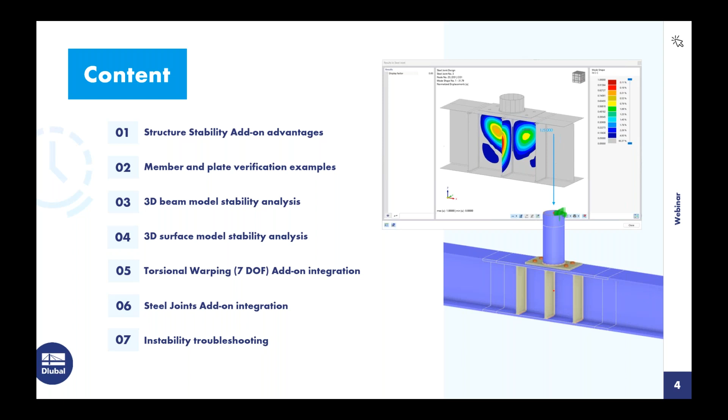So to begin, when looking at the structure stability, this is an optional add-on within the Rfem 6 program. This allows us to run an eigenvalue analysis to determine the critical load factors and eigenvectors, or in other words, the buckling modes of our structure. Therefore, we can evaluate the stability of the structural system in regions prone to buckling.

So when we're talking about regions prone to buckling, we're typically referring to very slender beams or columns or thin-walled shell or plate elements.

Now, everything that we'll be carrying out today will be according to a linear eigenvalue analysis, which we'll talk a little bit more about in the next slide, but keep in mind that a nonlinear stability analysis is also available where we can increase the load increments to see the failure of the structure.

As already mentioned too, not only can we look at the buckling modes of the structure, but we can carry out instability troubleshooting to locate modeling errors with a load-independent eigenvalue analysis.

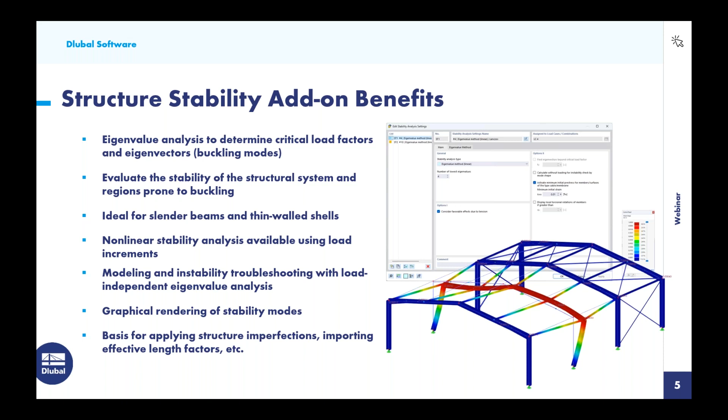Now, of course, through all of these examples we'll see the graphical rendering of the stability modes as we see over here on the right-hand side. Then we can integrate for further capabilities within the static analysis, such as applying structure imperfections. We can import effective length factors, and we'll see those carried out in the further design examples.

Now, when we do activate this add-on, we have 3 analysis types available to us. The first is the eigenvalue method, or a linear analysis, and this is essentially where the buckling modes are determined through a linear method. If we have any nonlinearities defined, either material or geometric nonlinearities within the model, these are internally converted to linear elements in order to carry out the stability analysis with constant stiffnesses.

Now, alternatively, we do have the incremental method with an eigenvalue analysis. This is nonlinear and will take into consideration all geometric and material nonlinearities. Essentially, we will carry out the failure criteria and nonlinear effects, and these will be included during the incremental loading increase. We will find the last stable state with this nonlinear analysis to carry out the linear stability analysis, or the eigenvalues.

The third option here is the incremental method without the eigenvalue analysis, also nonlinear. This is identical to option number 2 with that nonlinear analysis capabilities, except we simply won't carry out the eigenvalue analysis within that last stable state. With all of our examples today, we will be utilizing the linear eigenvalue method, but keep in mind if you do have those nonlinearities, it's capable within the add-on to also utilize these nonlinear options.

Looking at this example within Rfem 6, our main base program, we can see this W section profile with the 100 kip load applied at the top, the pin roller scenario, 12 feet high. We want to activate the structure stability add-on, which we can do within our toolbar by accessing our base data, or by right-clicking on the model name to access that base data dialog box. Under the second tab are all of our available and optional add-ons. For today, we're going to be utilizing the structure stability add-on.

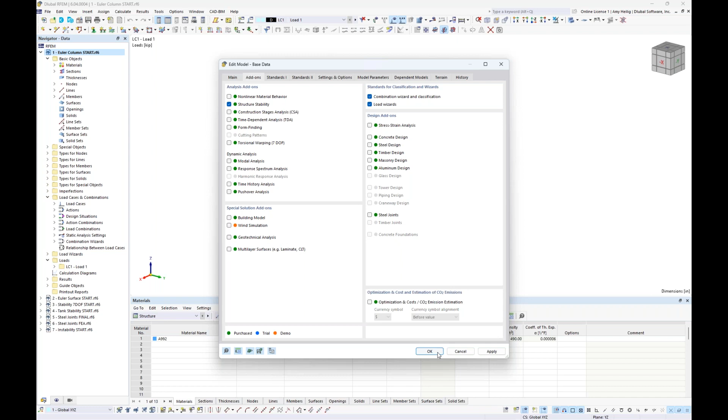When I click OK, pretty much nothing changes within the model itself, but we can go into the load cases and combinations dialog box. I currently only have one load case defined with that 100 kip load applied at the top of the column, and this will be carried out according to a first order static analysis. But we can activate the structure stability add-on with this checkbox at the bottom.

Looking at the default definition types, you'll notice there are two definition types immediately set. The first is an eigenvalue method linear analysis, which we should recognize from the PowerPoint. We'll carry out that linear analysis for today, and then we can set the number of eigenvalues to solve for - the default is 4, but we could increase or decrease this depending on our model. The second default setting is identical, just with a higher number of eigenvalues set to 10 by default. So carrying out the linear analysis with 4 eigenvalues, we'll click OK.

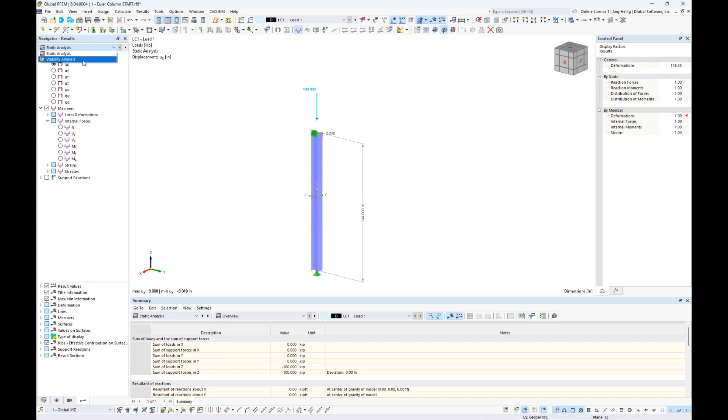To run this calculation, we're going to initially calculate the static analysis with this first load case, but then we will carry out the second calculation for the stability analysis. We're not so interested in the static analysis results, but immediately we jump to the stability analysis results now available in our navigator. When we look at the results for the structure stability add-on, we will see 4 different eigenvalues that we have solved for. In addition, within the table, we'll also see the critical load factor given.

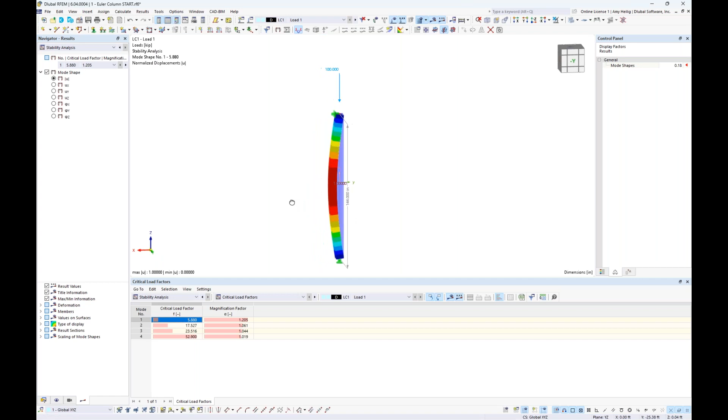The critical load factor for this first buckling mode shape, which we can see is buckling out of plane in the weak axis direction, is the factor that we can multiply the applied loads by - in our case 100 kips - before we see the structure fail, as shown with this first buckling mode shape. The second mode shape is buckling in the strong axis direction, and as expected, we see a higher critical load factor of 17.527. Again, we multiply this factor by the 100 kip applied load to determine the critical buckling load.

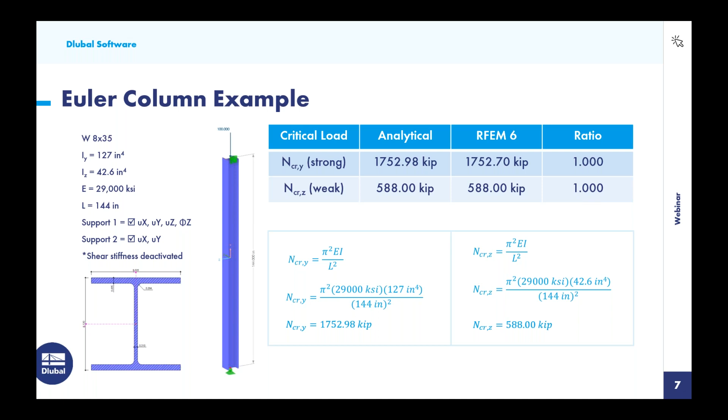So we take this information back to the PowerPoint to compare to the analytical calculations we've carried out within this slide. We can see that compared to the Euler buckling formulas, the Rfem 6 comparison gives us a ratio of 1.0. I think it's important to understand how we're carrying out this structure stability for simple flexural design here for the stability modes.

So we go into RFEM here to open up this example. As mentioned, this is a two-dimensional surface, 10 inches wide, 50 inches tall. I have left on the display here of the FE mesh, so you can see how the structure will mesh this for this two-dimensional object. We also have a 1 kip per inch load applied at the top here.

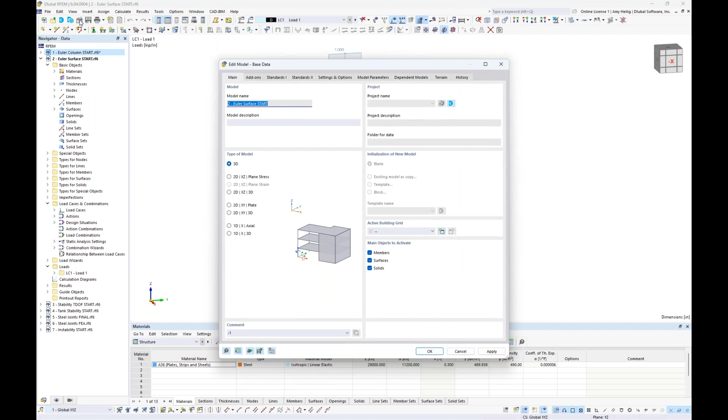Very similar to the column, we want to go into the base data, and we can do so within the toolbar directly to activate under this second tab, once again, the structure stability add-on. We go into our load cases and combinations. For this example, we have our single load case here with the 1 kip per inch applied as a line load at the top of this 2D surface element.

We want to not only carry out the static analysis, but also the structure stability analysis. We'll leave these default settings here for a linear analysis, carrying out 4 eigenvalues, and we can run this calculation. The program would initially mesh a structure if we didn't already have it, carry out the static analysis, and then we move on to the stability analysis.

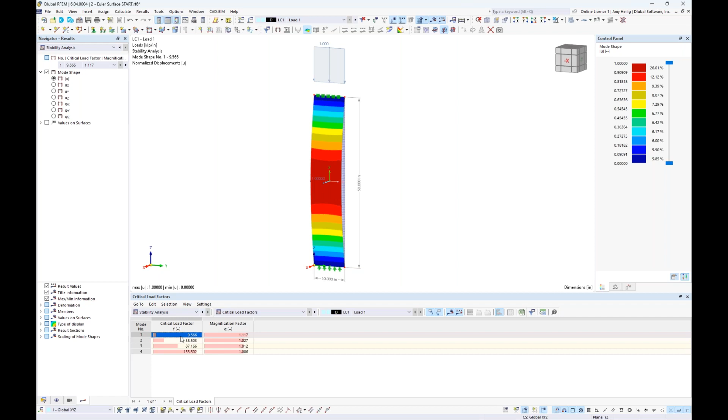Taking a look at our stability analysis results here within our dropdown, we see our 4 different mode shapes. The first mode shape you can see here is buckling out of plane for this 2D surface element with a critical load factor of 9.566. Taking a look at these additional mode shapes, we can see here the deflected shape, but the critical load factor here is much higher.

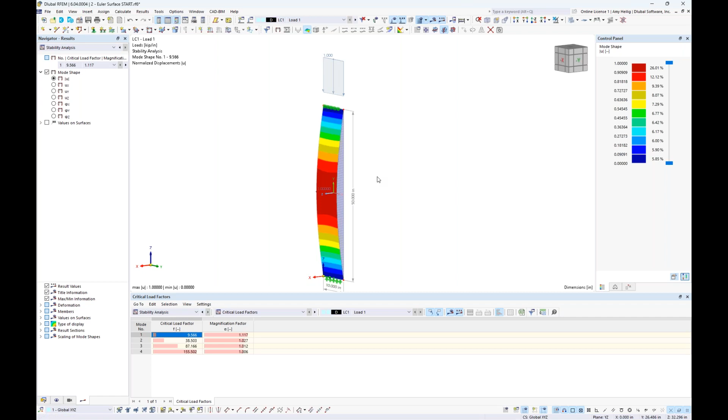In reality, we're most concerned with the lowest critical load factor. Again, this is the factor, this 9.566, that we can multiply the applied load here of 1 kip per inch before we would expect to see structure failure or the buckling out of plane. We take this information back to the PowerPoint to compare to the analytical formula, and we find a ratio of 0.997.

That should give us a better understanding of the basic behavior of this structure stability add-on for a simple beam and a simple surface. Now let us go back into RFEM to open up our third example.

This one should be a little bit more interesting, where we have a 3D structure that is composed entirely of beam elements. You can see that all of these are member elements for our columns, beams, braces, represented by a single line element here. So no surfaces for this particular example.

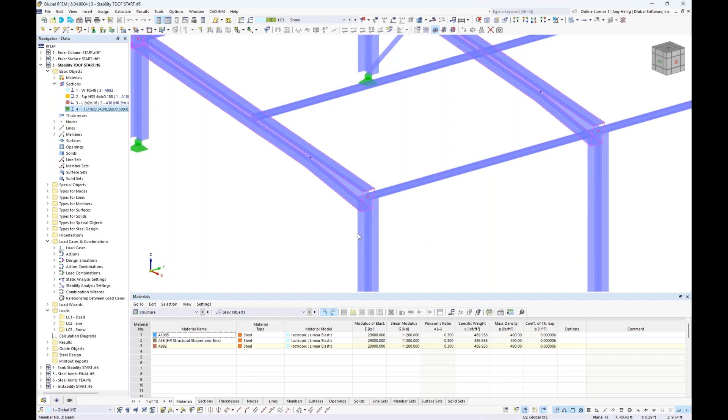For a quick overview, the cross sections are from the AISC database. So we have W10 by 49s. We have some square HSS sections spanning between these moment frames, single angles for our cross braces here for lateral bracing. We also have a very small taper for this beam member, in particular at 25% of the member length before it frames into the vertical columns.

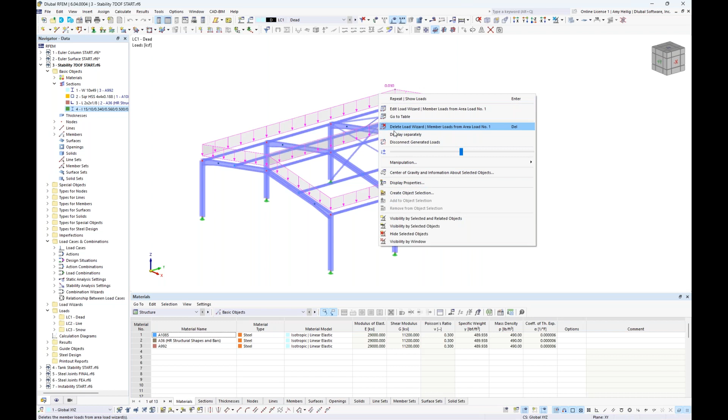Now, to quickly take a look at the loading for this example, I have only 3 load cases defined. We can view these loads here, and these are just general area loads created with the load wizard for dead load. If we're curious to see how the load distribution looks, we can right-click to display separately, and notice that I have created a one-way area load distribution so that the loads are mainly on these main beams here rather than the HSS spanning in the global Y direction.

We can also view here the live load, same concept. If we want to view the area load instead, we can see this shown here on the structure with a varied magnitude.

And finally, we have a projected snow load in the vertical direction. So for this example, I have applied only gravity loads. I think it's important to understand that when we're talking about the buckling behavior of our structure, we want to evaluate the worst case scenario where we have the highest compression forces in our members. For example, in our column elements, we want to see the highest forces acting in the downward direction. This is typically with gravity loads.

If we were to include wind uplift forces, this is only going to do us additional favors in terms of the buckling behavior, because now we have introduced additional tension forces in those members. So when we are evaluating the structure stability, we really want to look at those downward compression, possibly gravity only loads.

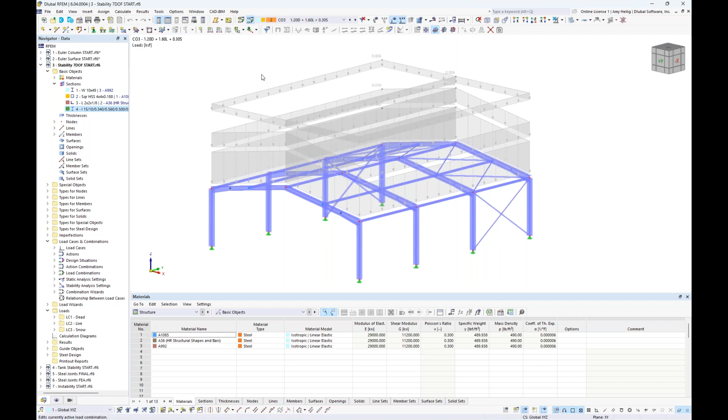Okay, so I have additionally combined these load cases into load combinations according to the ASCE 7, and we can see those displayed here graphically along with the relevant load factors. I'm going to go into my load cases and combinations. Now, we certainly could activate here the structure stability for each individual load case, as we did in our previous simple examples. But instead, I'm interested in carrying out the buckling analysis for my load combinations instead, where I have combined all the load cases together.

Now, the program by default creates 2 design situations based on the ASCE 7 2022 in this example. You can think of a design situation as simply grouping together all of our factored load combinations. We can see this here, LRFD according to the ASCE 7, as well as our second design situation, which groups together all of our unfactored load combinations. This will eventually give us an envelope solution for those factored and unfactored load combinations together.

Under the combination wizard settings here, I can go in and you'll notice that everything is solved here for our load combinations according to a second order analysis, but we have the ability to activate the stability analysis here directly within the design situation. These default settings are identical to what we saw previously within the load cases, that we can carry out the linear analysis, and perhaps I increase this to 10 different eigenvalues to solve for this structure.

So now that I have activated it within the design situation itself, I take a look at the load combinations individually listed out, and I can see now by default that the structure stability add-on is activated here. That's simply because I have activated that checkbox under the design situation itself. Now, by all means, we can come in here and individually carry out the structure stability for each individual load combination as well.

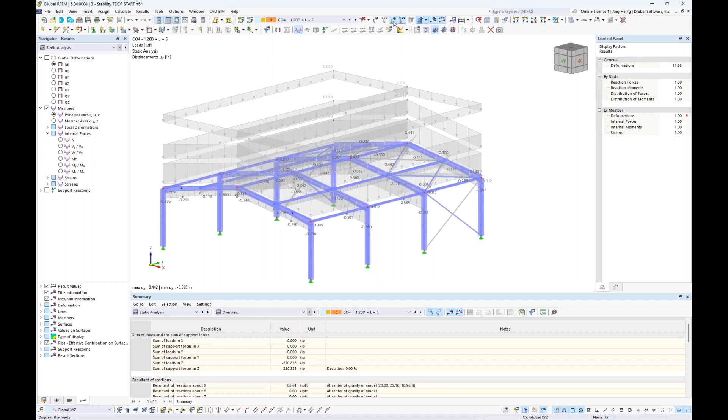So when we toggle this drop down to the design situation for our factored load combinations, again, this is nice because it's more or less an envelope solution for the static analysis. But you'll notice within this table here that shows our static analysis results for this design situation, we have the stability analysis envelope solution as well.

The minimum critical load factor is 10.532, and the controlling load combination is load combination number 3. So this is kind of nice that, again, we don't need to run each individual stability analysis for each load combination and manually check the results, but the program will give us the controlling load combination here.

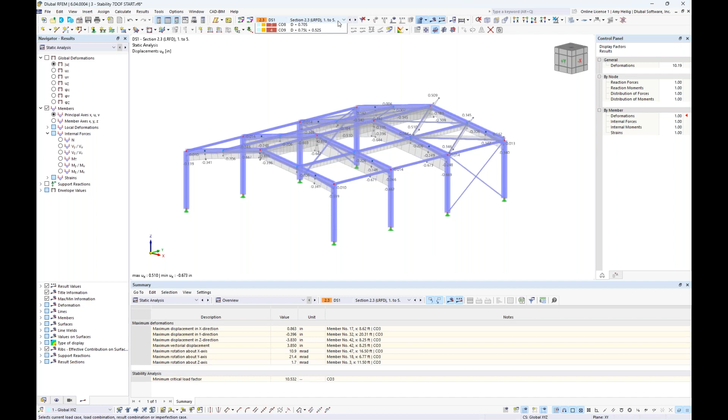So we toggle down just to display the loads for load combination number 3, and no surprise, this is certainly going to be the controlling case because we have all 3 loads activated with the highest load factors to give us the greatest compression forces in our members.

So we will toggle down to the stability analysis results for load combination number 3. As we have input into the program, we had solved for 10 different mode shapes. Starting with mode shape number 1, we kind of see a racking here of this initial moment frame with a critical load factor of 10.532 as we were shown here within the design situation itself. And essentially, we're going to see here the flexural buckling in the strong axis direction of these columns.

Looking at some of the additional mode shapes, we can see similar behavior just in different locations of the structure with a higher critical load factor. As we continue to increase, we may start to see more localized mode shapes. And what I mean by this, where we see the individual buckling of these columns, in particular in the weak axis direction. Whereas compared to the mode shape before, this is maybe more of a global mode shape that kind of affects the structure together.

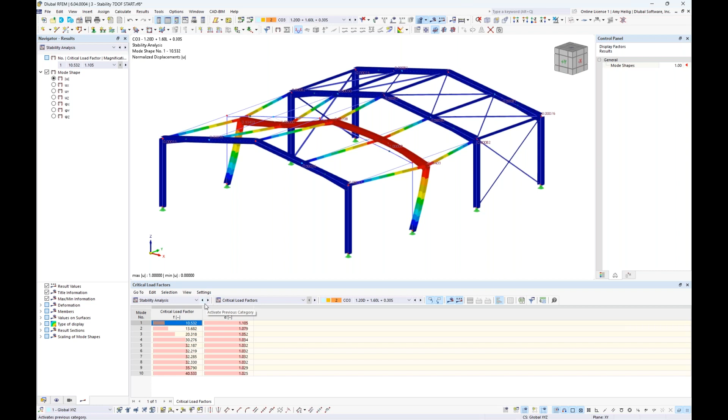Okay, so now that we are looking at mode shape number 1, let us focus in on this particular column, member number 10. When we are looking at the stability analysis results within the table, we can use this dropdown to view the results by member. When I graphically click on this member, the table updates to show member number 10's results, and we have 10 different mode shapes shown here.

In particular, for this first mode shape where we have failure of this column in the strong axis buckling, we can view the equivalent effective length factor, that K value, given as 3.012 in the strong axis direction. We also see here the effective length of 34.64.

So if we plan to take this a step further and design this structure, let's say according to the AISC or the CSA standard, and in particular according to the AISC, we want to design it utilizing the effective length method. The effective length factors are really important, so we have the ability to get that information directly from the failing mode shape here.

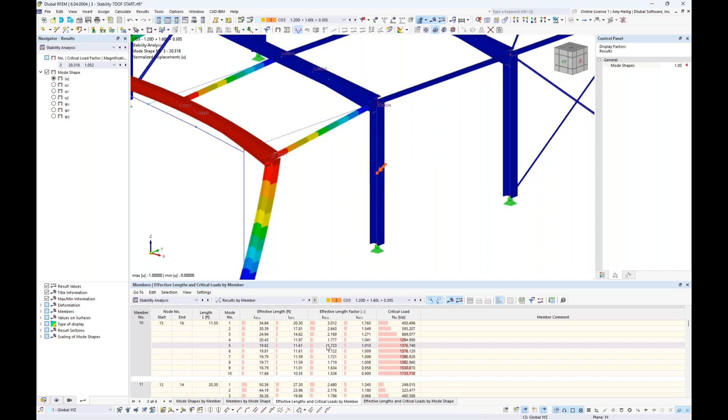Now, when I take a look at these additional mode shapes, they're really not affecting member number 10 until I get down to mode shape number 7, and here we see the failure in the weak axis direction for member number 10.

We see the relevant effective length factor in the weak axis direction given as 1.008, and the effective length as 11.59.

So assuming that we have already activated the steel design add-on within RFEM to carry out the steel design according to the AISC, information such as the unbraced lengths or effective lengths are always needed in order to carry out that design. And we do so by inputting the effective length for the member directly.

I want to show you a nice feature here: assuming we're carrying out design according to the AISC with that steel design add-on, we input our first effective length definition, where you have the ability to import from the stability analysis. When I turn on this checkbox, I get a new tab here where for the strong axis direction, for consideration of flexural buckling about the major axes, we can import that effective length factor directly from the stability analysis.

So we choose here load combination number 3, we will choose mode shape number 1, and we can either graphically select member number 10 or choose it within our dropdown. Notice that the effective length factor is automatically brought in as 3.01.

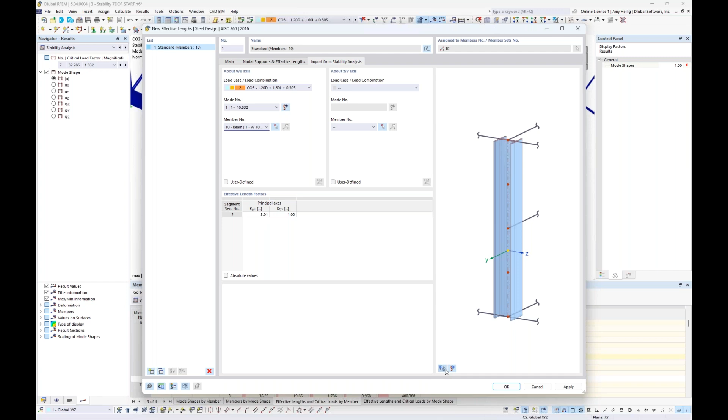We can do the exact same thing for the weak axis direction, again specific for member number 10. We will choose load combination number 3, but this time mode number 7. Remember, that was where we saw this column fail in the weak axis buckling direction, again for member number 10, and we see that effective length factor brought in automatically as 1.01.

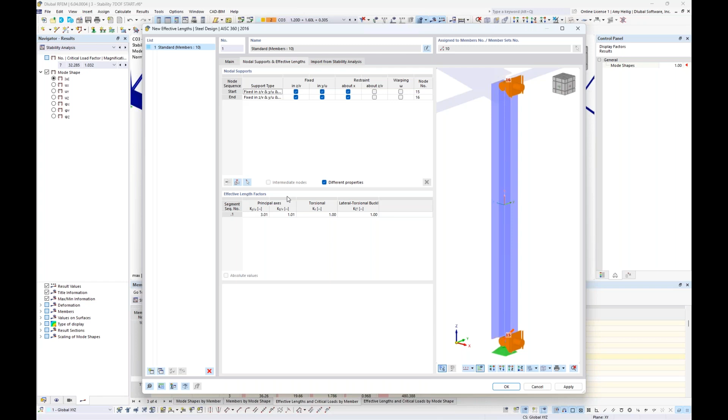So we don't need to do anything further here in terms of the effective length definition for flexural buckling in the strong and weak axis directions if we integrate this with the structure stability add-on.

Okay, so now that we have covered the basic stability mode shapes here, keep in mind that everything we have seen so far has been based on 6 degrees of freedom. And with 6 degrees of freedom in these various mode shapes, we notice that we're really only able to consider flexural buckling, and we certainly can see this directly with the mode shapes showing flexural buckling failure of the columns themselves.

But if we back up a step to look at the static analysis results, or the internal forces from load combination number 3, what we'll actually see is that we have pretty high bending forces along the length of our members, and when we look at our columns, pretty high axial forces of course. When we're talking about these bending forces, for example for these beams, this should immediately flag us that possibly lateral torsional buckling is an additional stability failure state that we need to consider.

So let us go back to the PowerPoint here to discuss these different stability failure modes. Now, we should be very familiar with flexural buckling by now for our members. Ultimately, there's some critical buckling load for the strong axis and the weak axis before we see this member fail with flexural buckling.

But there are also additional failure modes such as torsional buckling, which has its own critical buckling load factor, where we would see the member twist about its longitudinal axis. This might be quite common for something like a cruciform section.

Then we also have flexural torsional buckling. When we have an applied axial force on a member like a single angle that's unsymmetric, we're not only going to see flexural buckling, but it's also going to twist about its axis.

And of course, lateral torsional buckling is also a consideration when we have a bending moment along the length. So for singly symmetric or unsymmetric sections, we're not only going to see it move out of plane, but also twist about its own axis. The problem is that 6 degrees of freedom can only consider flexural buckling.

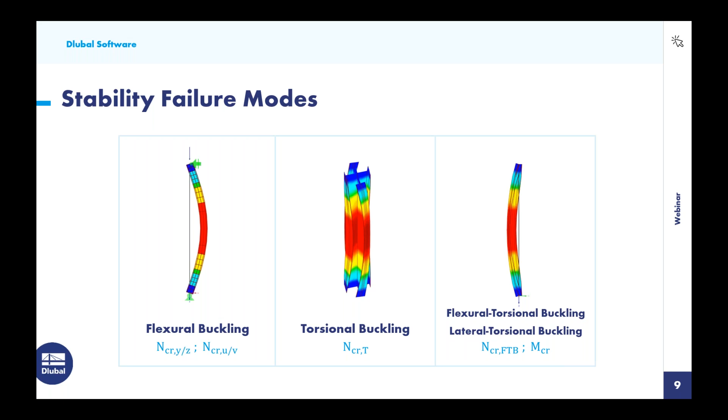Now, we can say, well, if we're designing according to AISC or CSA, the codes have analytical equations that design for these additional stability failure modes. But that's in the design process. What I'm talking about specifically is the static analysis as well as the structural stability. So how do we consider these additional failure modes?

The answer is to enable the 7th degree of freedom, or warping. We have an additional add-on within RFEM 6 called Torsional Warping 7 Degrees of Freedom. This allows us to consider cross-sectional warping with an additional degree of freedom for member calculations. And everything is integrated automatically, including both the static analysis and the structural stability add-on, to determine additional member critical load factors and mode shapes.

So again, 6 degrees of freedom can only consider flexural buckling failure. That's everything we have seen up until now. I did want to note that with 6 degrees of freedom, the load application is always at the member shear center.

So now when we enable that 7th degree of freedom, we can additionally capture the torsional, flexural torsional, and lateral torsional buckling behavior. And when we enable that 7th degree of freedom, we get a load application at the center of gravity, or the centroid of the member, instead.

What we will see in just a minute is that when we enable this add-on, we get additional options available to us, such as member transverse stiffeners, to restrain the warping along the member length.

Now, currently in RFEM 6, the 7 degrees of freedom is not linked in the steel design add-on when carrying out steel design according to AISC or CSA. It is currently linked for Eurocode only. We do plan to link those in the future to consider that 7th degree of freedom, but currently the full static analysis and the structural stability can easily consider the 7 degrees of freedom, which we'll see in just a minute. So just keep that in mind if we're taking this a step further with the steel design add-on.

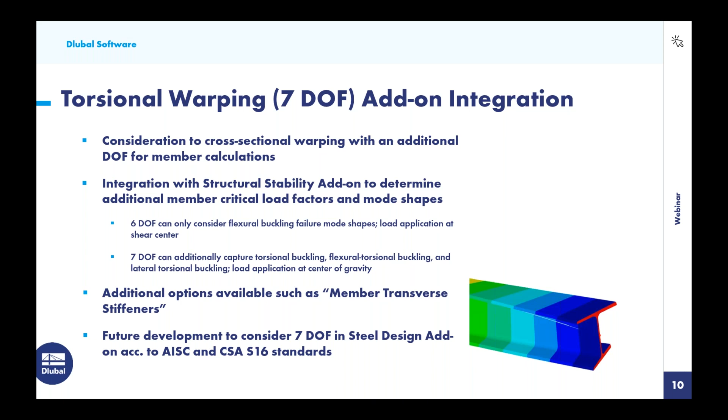Okay, so what we will do here is go back to the RFEM model, and we want to go into the base data. Under the second tab, we will activate not only the structural stability, but the torsional warping 7 degrees of freedom. When I do this, the program says it needs to delete the results, of course, because that was all based on 6 degrees of freedom.

Now, by default, all of our members are considered free to warp. There is no warping restraint along the member length.

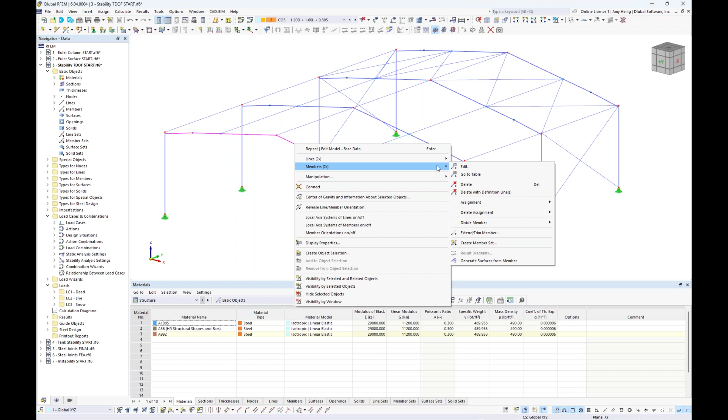In addition, if you would like the warping internal forces to be transferred to adjacent members, it's important to create what we call a member set. So if we want the warping forces with the 7th degree of freedom to be transferred from, let's say, our beam on the right over to our beam on the left, we would need to hold down our control key to make sure both are highlighted. We right click, and under the member option, we have the ability to create a member set. That's simply grouping those members together so those warping internal forces will be carried out to adjacent members.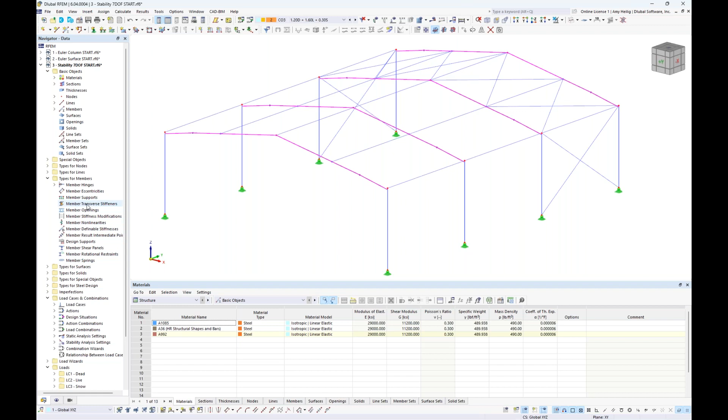Now, circling back to the warping restraints, we should see under types for members that we have a few additional options, including member transverse stiffeners. I'd like to double click on this to create a few stiffener types for these members in order to restrain the warping at the member start and at the member end. Within this dropdown, we actually have several different stiffener types.

For example, we can choose a flat plate where we could input the material and the dimensions, and the program will automatically calculate the warping spring to be considered within the analysis.

For today, we will use this option at the bottom called warping restraint, where we will use the full warping restraint. I want to apply this to the member based on a certain percentage of the length, so I'm going to activate this warping restraint at 0% of the member length, or the member start.

I'm going to add in a second warping restraint at the member end, so 100% of the member length. Then we can graphically select which members we would like to apply this warping restraint to. I'll use my selection box to select all of those main beams, then click OK, and you'll notice we get a nice symbol shown here representing where that warping restraint is located at the member start and end.

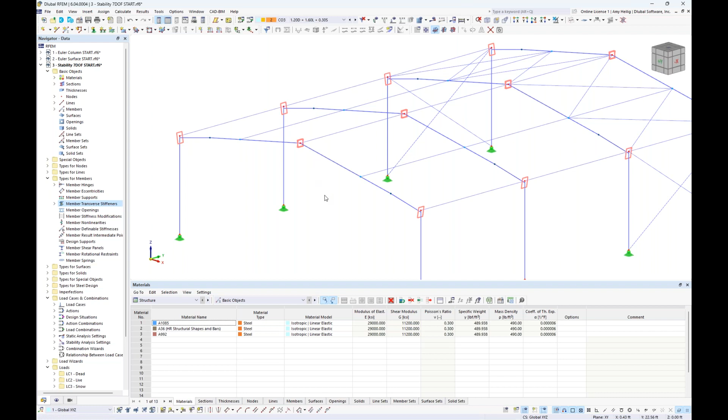Now we want to go to calculate all, and we have to rerun the static analysis with 7 degrees of freedom. We see the load cases carried out, but also those load combinations according to a second order analysis. Then we run through the structure stability again for all load combinations, and we should see slightly different results here.

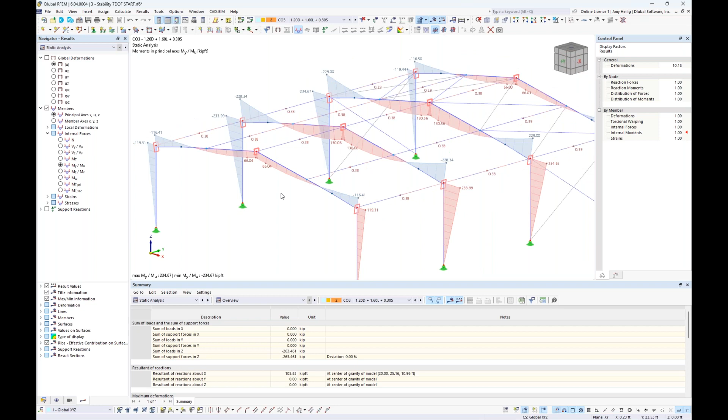Taking a look at the static analysis results, where we can view the internal forces of our members, you'll notice we have a few additional options now with that 7th degree of freedom. For example, we can view the warping moment along the member length, or the primary torsional moment and the secondary torsional moment. This previously was not available with 6 degrees of freedom.

Toggling down to our stability analysis, we should see pretty significant or different results here as well. No longer do our 10 different mode shapes look like what we previously saw with 6 degrees of freedom.

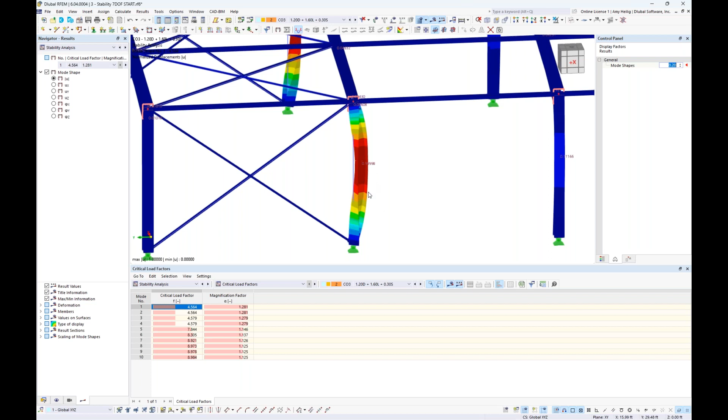The critical load factor is now 4.564, and our relevant mode shape is really focused on these columns. We can increase the size of this mode shape ever so slightly to see how this column has essentially flexural torsional buckling, where it is both bending out of plane but also twisting about its own axes.

So you can see that the critical load factor has significantly decreased. Previously it was around 10.5, and now it's only 4.564, before we go on to look at the relevant mode shapes here.

Now, when we look at these first four mode shapes, it's really flexural torsional buckling of these columns, but then we get into mode shape 5 with a critical load factor of 7.84, and this is where we begin to see lateral torsional buckling of those beam elements themselves.

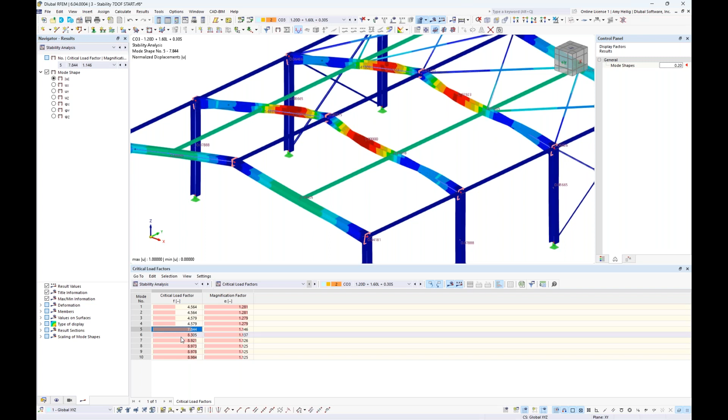So again, when we are carrying out 6 degrees of freedom, if we're only concerned with flexural buckling, no problem, the program automatically considers this. But if flexural torsional buckling, lateral torsional, and torsional buckling are also a concern, then we really would want to consider enabling this 7th degree of freedom.

All right, so this should give us a pretty broad overview now of member stability design. I now want to move into our next example to talk about surfaces.

So you'll see here that I have a tank model, and everything is composed of 2D surface elements. The tank wall is a surface element, as we see here, as well as the tank roof.

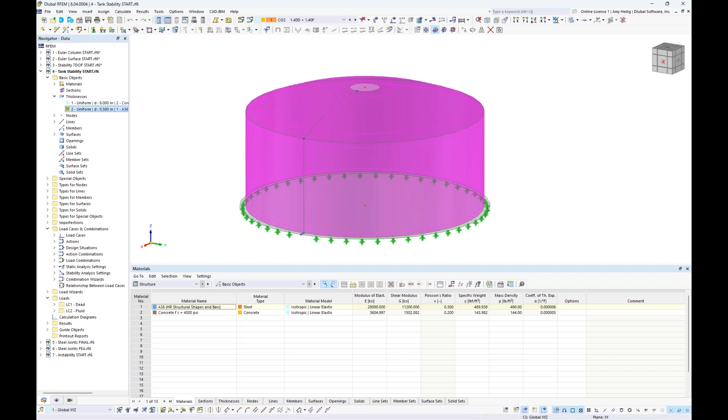To talk a little bit about the thicknesses and the materials, the entire tank wall and roof are going to be comprised of 1/2 inch thick A36 steel material. And then at the bottom here, we have an 8-inch concrete slab, 4,000 PSI concrete.

I did want to point out that this structure was entirely created using our block options up here in the toolbar. When you take a look at the various block options, you'll see all the different categories for the different structure types, including silos and storage tanks.

Within these options, as I cycle through them, you'll see all of the various choices. If I double click here, I have the ability to define the dimensions, the material, and even some loading capabilities are automatically created. That is how this example here was created automatically.

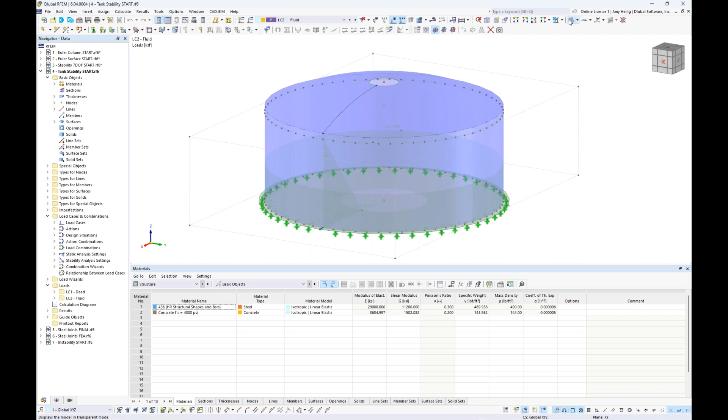For this example, we have only 2 load cases. We have a simple dead load where only self-weight is active, so no additional loads apply to this tank structure. We also have a fluid load, automatically created with the block import option, to represent fluid inside the structure acting with an outward pressure against the tank walls.

We also have a downward pressure acting at the base for the concrete slab. So I've left this with only these 2 simple load cases, because for load case number 2, the fluid load, we get pretty significantly high compression forces in our tank wall to carry out the buckling analysis.

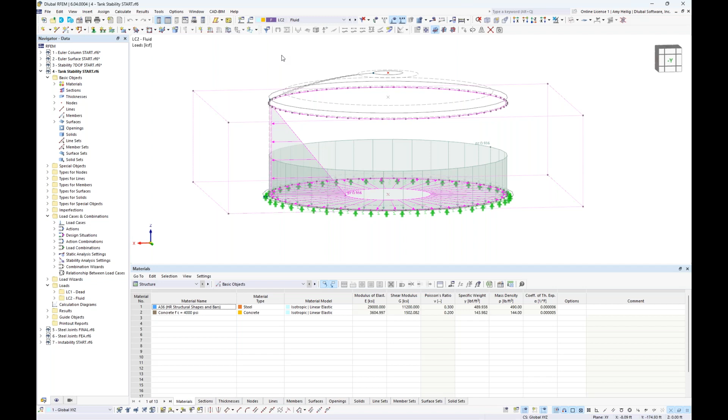So I want to go into the load cases and combinations dialog box, and carry out the structure stability here - a linear analysis with 4 different eigenvalues is fine for load case number 2, the fluid load. When I calculate this, the program will generate the FE mesh for our tank, run through the static analysis, and then run through the structure stability analysis for those 4 eigenvalues.

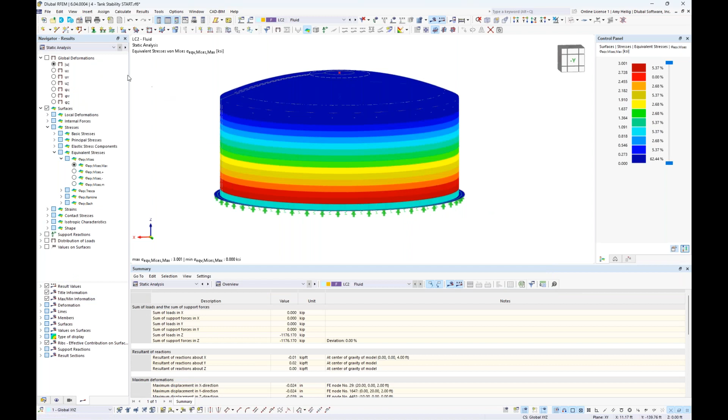Once this is done, we'll see under the stability analysis the relevant buckling shape. I'm going to create a user-defined visibility for only the tank walls, so we can see this in a clearer form.

We have 4 different mode shapes that we've solved for. Notice that the critical load factor is quite low here at 2.882, and we see the relevant buckling mode shape - localized buckling modes all around the circumference of our tank walls. When I look at these additional mode shapes, the critical load factor is almost identical, around 2.8 or 2.9. Just notice that the location of these buckling modes has changed ever so slightly.

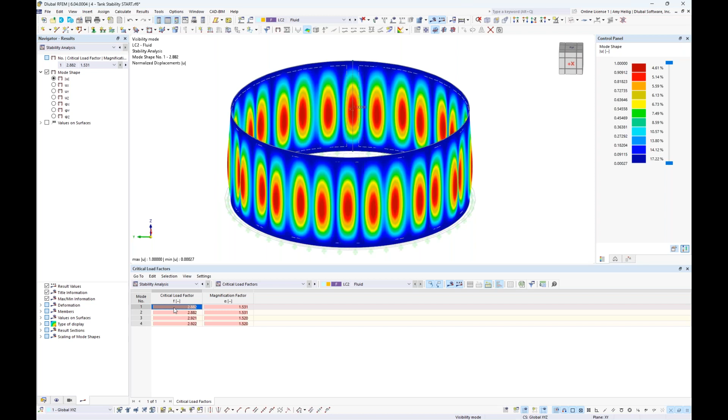So when we back up a step to just look at the structure in general, everything that we model in an FEA software is considered perfect. What I mean by this is that everything we've modeled considers that the manufacturing process is perfect, that when we essentially install this structure out in the field, it is...

...perfectly aligned, but we know in reality that's never the case - there's usually some type of imperfection with the manufacturing and/or installation of these structures. When we refer to the various codes, there are ways to consider these imperfections, and one of them is to directly model the imperfection in our FEA model. So I'd like to show you how we can directly model these imperfections, integrating it with the structure stability in that first buckling mode shape.

When we go back to the navigator within RFEM, you'll see an option within the folder called imperfections. It should be known that imperfections is one of the available options in the base program - you don't need any additional add-on for this. What we can do here is create a new imperfection case. Under the imperfection type, we can choose buckling mode. We can either select a load case or a load combination.

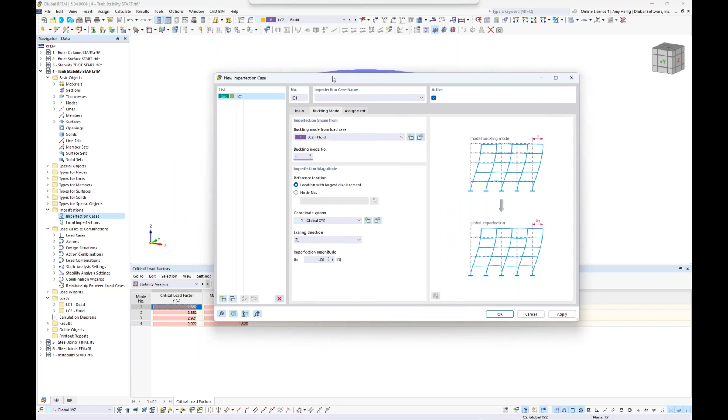If you remember, we carried out the stability analysis for load case number 2, that fluid load, and we can choose the relevant mode number 1. We can deform the mesh by scaling that mode shape, and we see the imperfection magnitude options down at the bottom, where I can import that buckling mode and scale it based on the X, Y, or Z directions.

Now for our case, we have a round structure that's not necessarily in these global X, Y, and Z directions. So for this, we also have the spatial option, where I can tell the program to scale that buckling mode shape to a specific value that I input here. So we put in something quite small, like 0.03 feet.

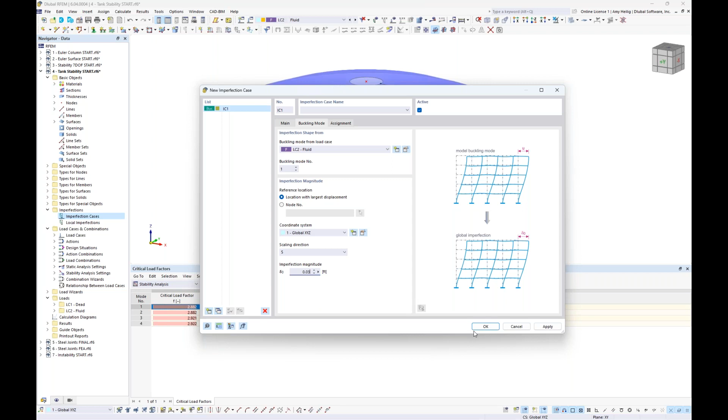So what I'm trying to replicate here is, let's say, a manufacturing defect where we know that this tank wall isn't going to be perfect. I'm going to deform the FE mesh before I apply any additional loads to carry out the static analysis.

So now that we've created this imperfection case, we're going to go back to our load cases and combinations dialog box. Under the design situations - we should be familiar with design situations - we go back in to edit the definition type. Remember, we're carrying out a second order analysis. We previously activated the stability analysis, but here you'll see an additional checkbox option to consider the imperfection cases, and this is typically by default always checked on.

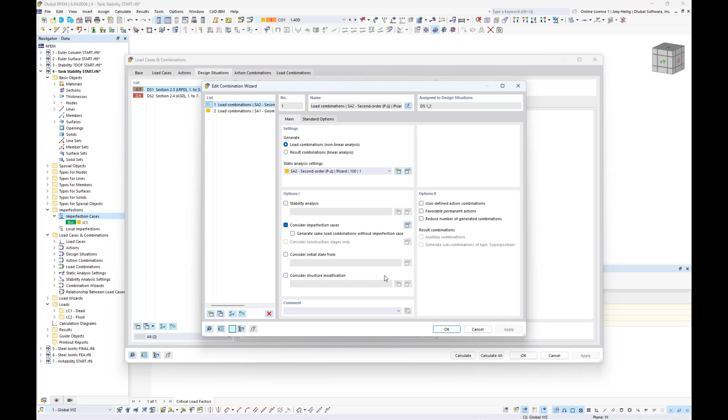So now when we go to our load combinations individually listed out, we see this imperfection automatically considered. When we take a look at load combination number 2 here, we're going to first deform the mesh based on that buckling mode and the scaled magnitude that I had put in.

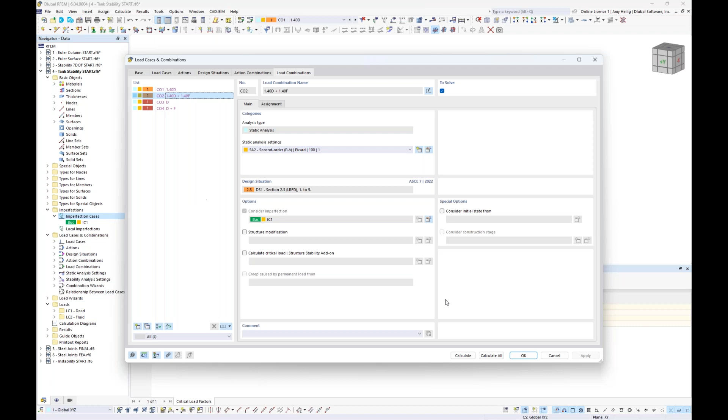Then we're going to apply the static loads, dead load and fluid load, to give us a full static analysis result. So we can go to calculate all just to see what our results look like with this imperfection now considered. The program will carry out all these load combinations with that imperfection considered according to a second order analysis.

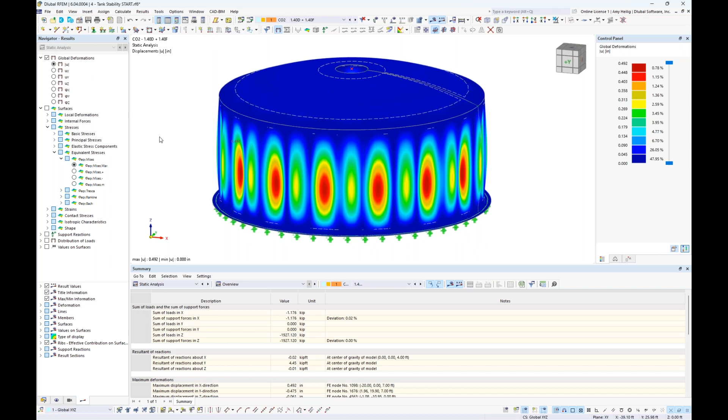So currently I am looking at load combination number 2, which is the dead load plus the fluid load. Sure enough, when I look at my deflected shape for the static analysis—not the stability analysis, but the actual static analysis—we see the deflected shape replicate those imperfections where we have directly modified that FE mesh.

In addition, we're probably also interested in the surface stresses, so we can activate here under our surfaces option such as the von Mises stresses. And because of that deformed mesh as well, we're going to see slightly higher stresses at these particular locations where that deformed mesh is also applied.

So these imperfections can be really powerful in the sense of integrating with the structure stability add-on to outright model the imperfections, not only for surfaces, but we can also do so for members.

Okay, so jumping to our second to last example here, I am going to focus in on a much smaller scale for the structure stability. So now I would like to turn to talk about steel connection design according to the AISC.

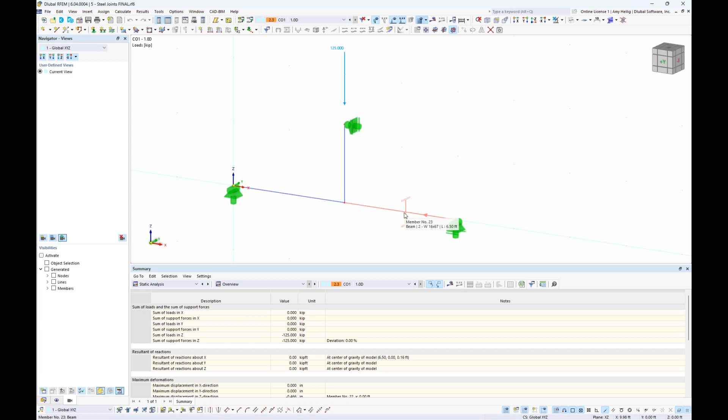You'll see here that I have a very simple model, and this is all carried out with one-dimensional members. If we turn this into wireframe view, and then go back to the rendered view, what we have here is a simple W cross section for our beam at the bottom. Then we have a vertical pipe member framing into this beam with a point load of 125 kips.

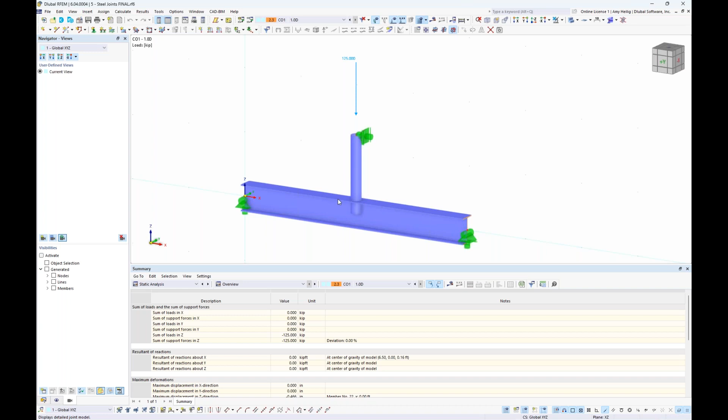I have activated our steel joints add-on, which allows us to carry out the connection design according to the AISC. Now I've already input all of this information directly for this particular node where these members are intersecting, and we can graphically see some of those components here.

Just to mention, I previously did another webinar devoted entirely to steel joint design, so I'd certainly refer you to that on our website and YouTube channel, because we won't be able to cover everything in just a few minutes here.

But the powerful thing about our steel joints add-on is that it creates an FEA model underneath the hood, meaning that any connection is possible. We are not just limited to standard connections carried out with analytical equations. Rather, this is a pretty non-conventional connection here, and that FEA model is created underneath the hood to carry out the AISC design.

What this also allows us to do, under types for steel joints, is I actually have 3 different scenarios for this connection design. If we go into the steel joint directly, my first scenario is considering the connection with no stiffener plates—rather, we just have an end plate connected by bolts to the top of the beam flange. We have our pipe member welded directly to that end plate, but again, no stiffener plates.

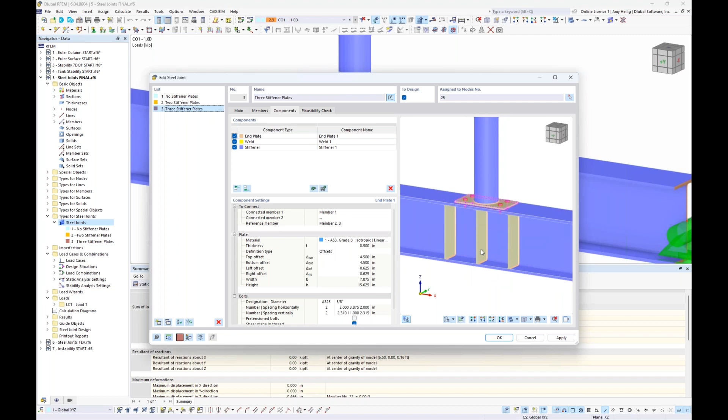Then I created a second scenario to compare, where we have applied 2 stiffener plates—you can see that additional component added at the left and right of that end plate. And then I created a third scenario where we have a third stiffener plate applied right at the center where that pipe is framing into the W section.

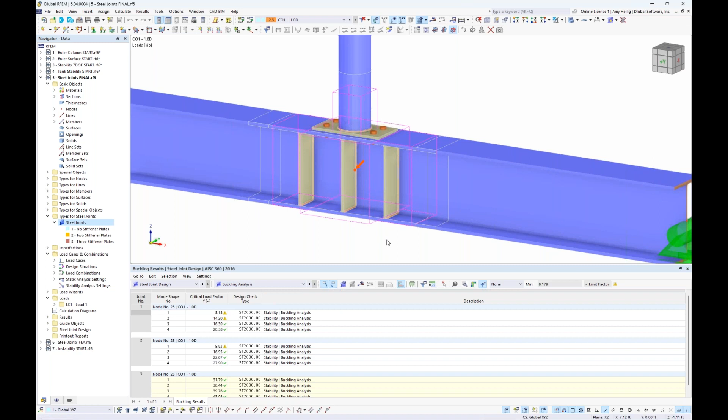So when we carry out the design here, we will go ahead and open up the saved results. Of course, we're going to give you full design of the bolts, the welds, and the plates according to AISC. But we also have the ability to integrate with the structure stability add-on to carry out the buckling analysis of this connection. For these 3 different scenarios, I see my buckling analysis results, and you'll notice the critical load factor for the first scenario, no stiffener plates, is given as 8.18.

And if we're further interested in seeing the buckling shape without any stiffener plates of this connection, we can go ahead and activate this option here in our toolbar to view the results in the steel joint.

So I can scale this mode shape slightly where we can see this FEA model that was generated underneath the hood, and the actual structure stability analysis was also carried out so that we see that really buckling of the web is a concern for this particular connection.

Now moving on to the second scenario where we have 2 stiffener plates, we'll notice here that the critical load factor is slightly higher at 9.83. Let's take a look at the mode shape considering 2 stiffener plates, and when we view this deflected shape, again there's still a concern of web buckling in between these 2 stiffener plates at the left and the right.

And finally we have our third scenario where we've added in this third stiffener plate, also shown here graphically. You'll notice that the critical load factor jumps immensely to 31.79, so we can multiply our loads by 31.79 before we need to be concerned with any type of buckling with this connection design. And what you'll notice with the deflected shape here is that the stiffener plate itself is actually going to buckle before the web element does.

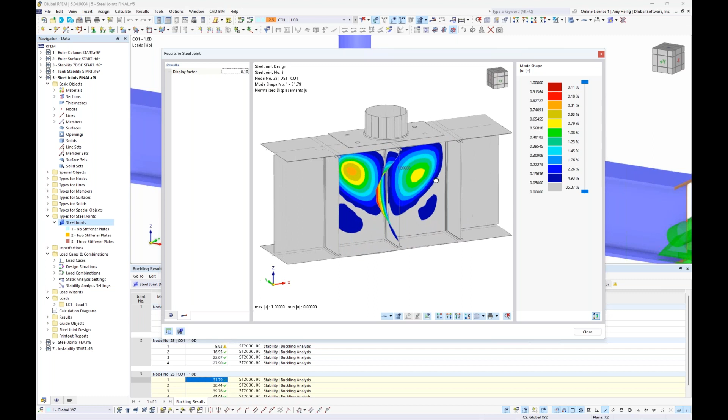So again, just these three different scenarios allow us to see the buckling behavior integrated with that structure stability add-on. When you own both the steel joints add-on and the structure stability add-on, you by default have all of these results available to you. You also have the option in the lower left-hand corner to save the steel joint model.

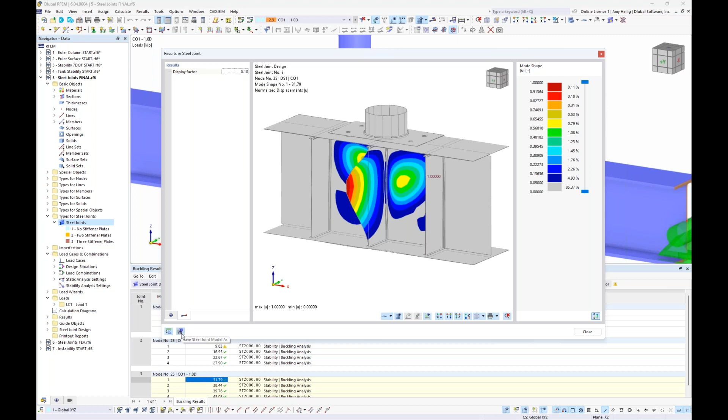And what this means is that, again, the program's creating this 3D FEA model underneath the hood. So I went ahead and saved that just to show you what's going on in the background. The bolts, the welds, all of the plate elements are created automatically by the program with this FEA model that you see here, in order to carry out the connection design.

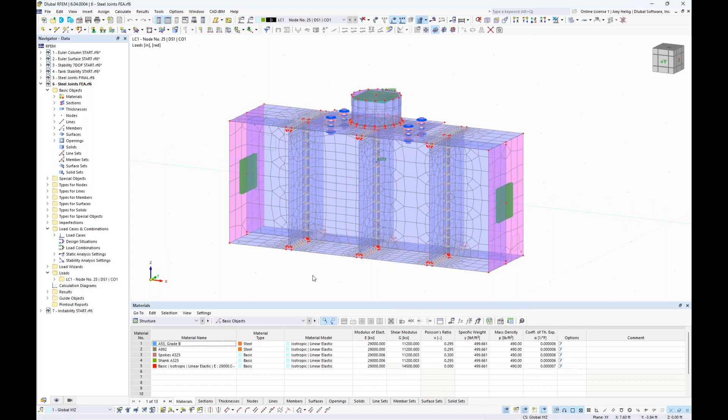In addition to AISC design, again, we're carrying out the stability analysis. So every example that we've seen up until now is the same workflow going on underneath the hood, where we can view under the stability analysis results 4 different eigenmodes, the critical load factor of 31.792 before we see the buckling of that stiffener plate, and then also the relevant mode shapes with slightly higher critical load factors. So again we start to see concern for the buckling of these web elements.

So pretty unique and powerful, again, about what's going on underneath the hood for any connection type because of the ability to generate this FEA.

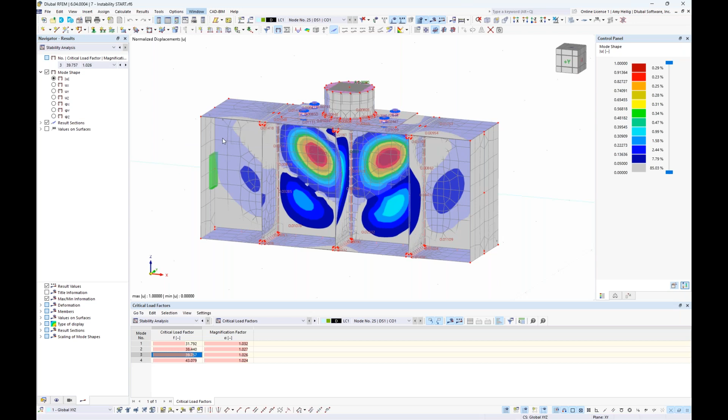All right, so the final thing we want to go over here is instabilities. We'll jump to our last example, and no longer are we going to focus in on structure stability or the mode shapes of our structure, but let's turn to the topic of instabilities. Instabilities are not unique to RFEM, they happen in any FEA program. The question is, do you have the necessary tools to help you investigate where these instabilities are coming from? The structure stability add-on can be incredibly helpful with this topic.

So we have here just a general steel structure modeled with all beam elements, and these come directly from the CSA standard this time with W250 by 80 steel shapes, some HSS members, and so on. I also have various applied loads. We'll see the dead load applied here is an area load. We have snow load, and then we also have a couple wind loads in the global X direction and the global Y direction. All of these are combined into load combinations here according to the NBC standard.

So again, not really focusing on the stability design, I just want to carry out the static analysis of the single dead load case. By default, load cases are run according to a first order analysis, so I go ahead and run this calculation, and what we find with this first order analysis is our first instability.

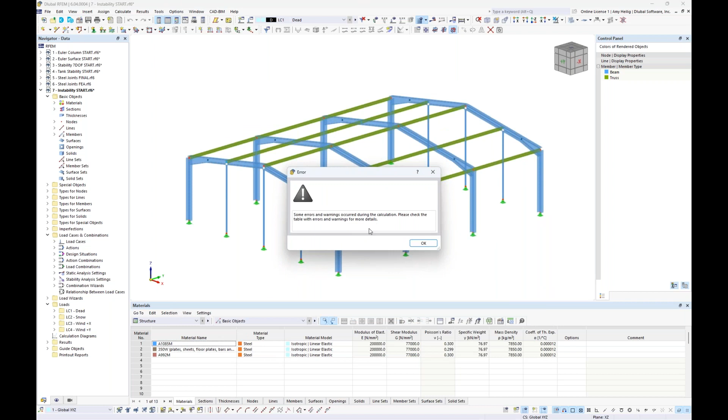So we get a warning message in the program, and when we take a look at the table results down here, it tells us the stiffness matrix is singular - the structure is unstable in the direction of the global y-axis. Now, this red arrow can certainly be helpful in a lot of cases where we maybe have a modeling error. If it's something a little bit more of a global instability, this red arrow is really just pointing to a single FE mesh point anywhere on the structure, so it may not be as helpful in those cases.

If we have ruled out any modeling errors and we're really unsure why we're getting this instability, what we want to do here is go back to our load cases and combinations dialog box, just like what we've previously done to activate the structure stability add-on.

This time I'm going to go into the default settings to modify this to calculate the eigenvalue analysis without loading, for an instability check by mode shape - a load independent eigenvalue analysis. When I click calculate for load case number 1, the static analysis, we're sure enough still going to see that instability.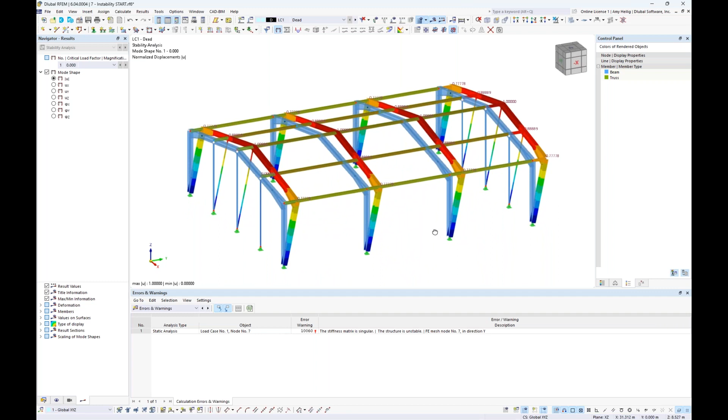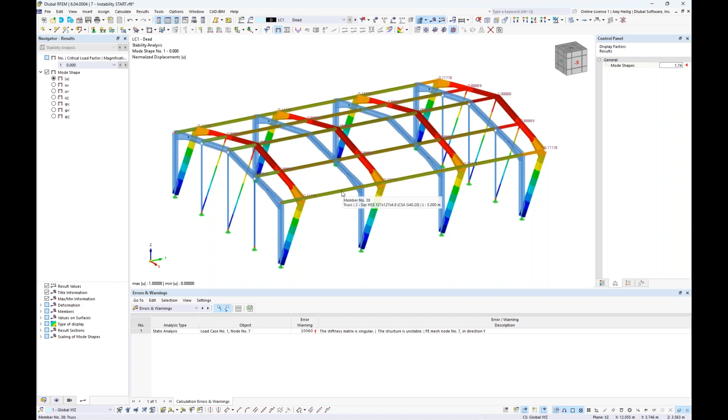But what we will also see now is the load independent eigenvalue analysis run, and we will begin to see what the problem is with our structure. If I increase this mode shape deflection, we see that the structure is just free to hinge about its own axes in the global Y-axis, simply because we have pin supports everywhere.

These member ends are connected with pin moment ends, so we have no lateral bracing for this steel structure. In order to resolve that, let's create a few members. I'm going to draw a new single member. The member type will be tension only for this lateral bracing, and the cross section will just be a single angle I've already defined in the model.

I'm going to turn this into wireframe view where I can snap to this particular node, and the program asks me to clear my results, no problem. What you'll see here is that the program automatically detects these snap points to allow us to create this cross bracing for this last bay shown on the right.

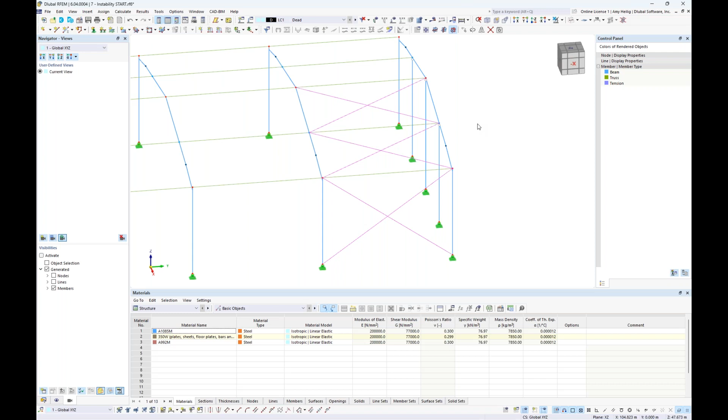Now that we have modeled this lateral bracing on the right-hand side of the structure, I can hold down my control key to select all of the elements. I can mirror this to create a copy about the YZ plane, selecting my mirroring point at the top of the structure. Now we should see this lateral bracing applied at the left side of the structure in that last bay.

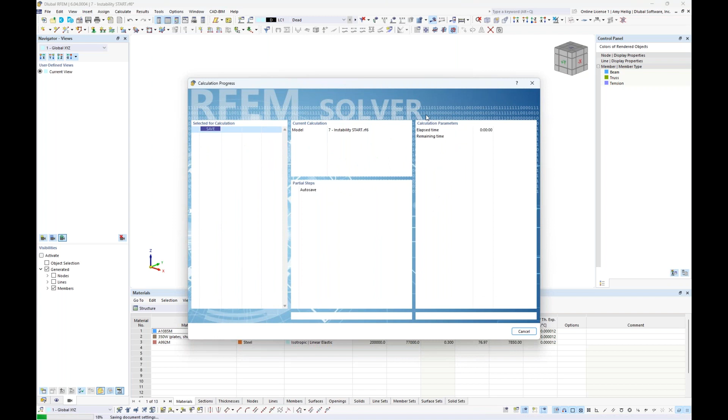So what we would hope is that we can go into our load case 1 to rerun this calculation. We'll cycle through the static analysis, and unfortunately we'll find again another instability. When we take a look at this new instability error, it tells us the instability occurs here, where this red arrow is, around the global axis X.

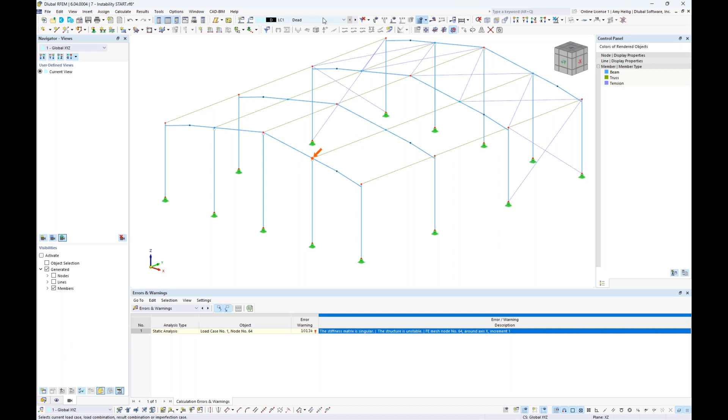So again, we've kind of ruled out any modeling issues. We're not sure what's going on, but I've left that structure stability add-on active for load case number 1, so I can simply turn on my results, and sure enough I see what the issue is. It appears that this column is not connected to the rest of the structure.

So in this scenario, this red arrow is certainly helpful for identifying where that modeling error occurs. When I turn off the results and zoom in wireframe view very closely, sure enough I see that these two nodes are not connected. So I can simply take this node and drag and drop it here to this other node connected to the frame.

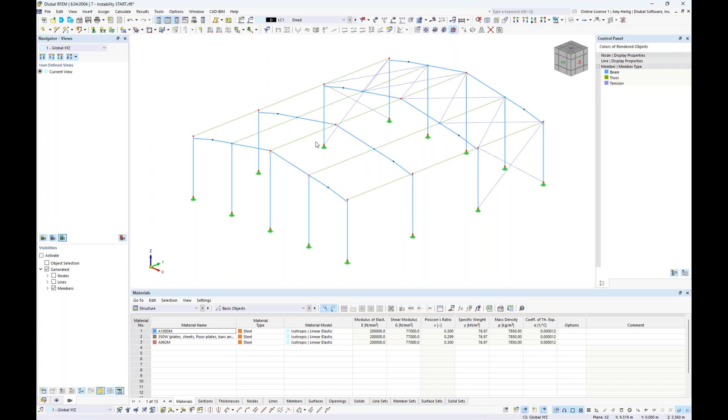What we should see now is hopefully the dead load will solve and we have no more instabilities for this load case. So assuming now that everything is solving for first order analysis for these first few load cases, we want to drop down to a load combination. I'll start off with this load combination here, dead load plus snow load - and keep in mind, this is always run by default according to a second order analysis.

So again, my load cases solve fine. We're moving on to load combinations. I'm going to carry out this calculation, and the program will attempt to run this. What we should find here is our third instability - this time the structure is unstable around the global x-axis.

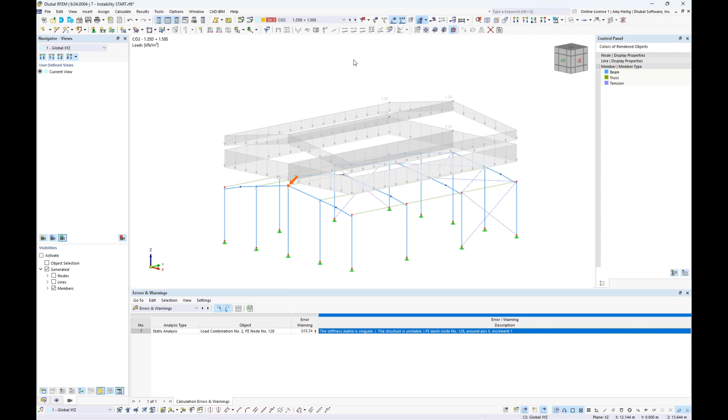Now, when I turn off the display of the loads, we've really ruled out any modeling issues because those load cases under first order analysis solve perfectly fine. So we know that nodes are connected, everything is fine there. What I would suggest doing for instabilities under load combinations - these are by default solved according to a second order analysis - is to change this to a first order analysis.

In addition, we can activate this structure stability add-on, but I'm going to go into my definition type and carry out the standard eigenvalue analysis with 4 eigenvalues to solve for. So we would hope then that we'll go ahead and solve load combination number 2, and that the first order analysis will solve okay.

What we see here immediately is that no errors are shown. The structure solves just fine under first order analysis. So what could possibly be the problem then with second order analysis?

I toggle down to my stability analysis results, and we immediately see what the issue is. The 4 eigenvalues that we solve for have a critical load factor of 0.67, with the relevant buckling mode shape for these very slender columns shown here. Anything under a value of 1.0 is always a problem. This means the structure cannot take on 100% of the applied loads in load combination number 2 before it's going to fail, as we see here.

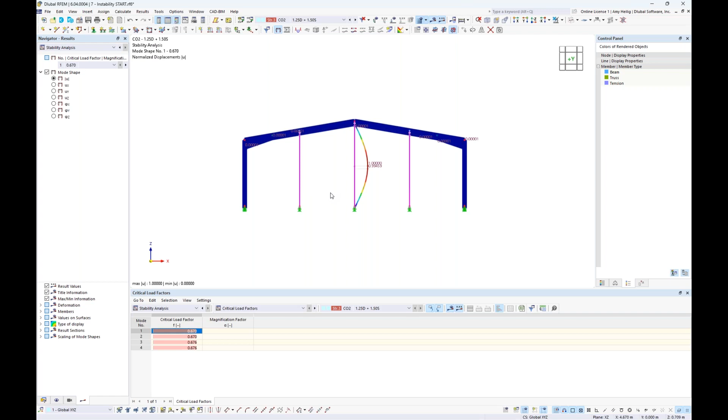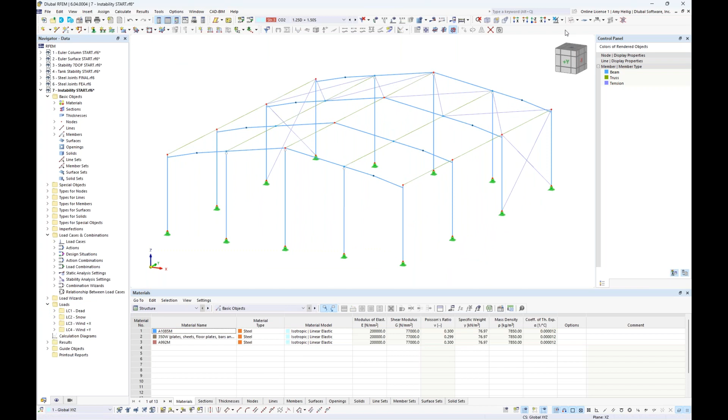So we're going to select here all of our vertical columns that are very, very slender. We'll go ahead and double click them, and under the section we're going to modify this. Instead of an HSS 51 by 51, we'll change this to an HSS 127 by 127. When we click OK, let's take a look at the model. Even in the rendered view, I think we can all agree this looks like a much more applicable section than that very slender HSS.

I'm going to go back to load combination 2, and change this to a second order analysis, which again is what we would hope to carry out considering P-delta effects. We can leave the structure stability add-on active here, and now hopefully with these more robust sections, we should see the full static analysis solve for second order.

Sure enough, we see the calculation carry out just fine. We can turn this into wireframe view so we see all of our static analysis results.

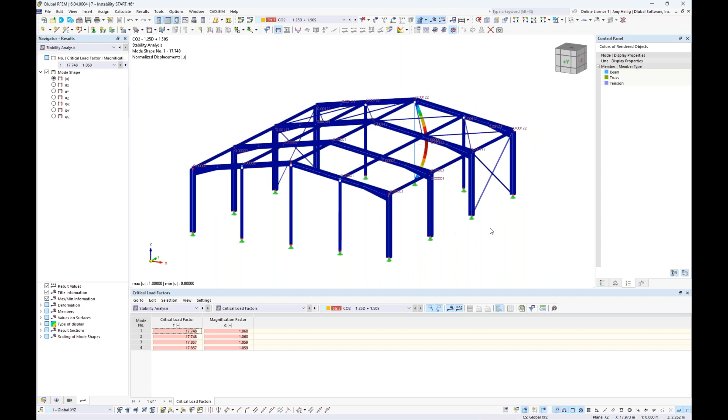We also toggle down to the stability analysis. Looking at the first 4 mode shapes, we still have buckling here of these columns, but the critical load factor is now 17.748. So we could probably say that this failure of these columns is not a concern, because the structure can take on 17 times the applied loads from load combination number 2 before we would see it fail, as shown here within this first mode shape.

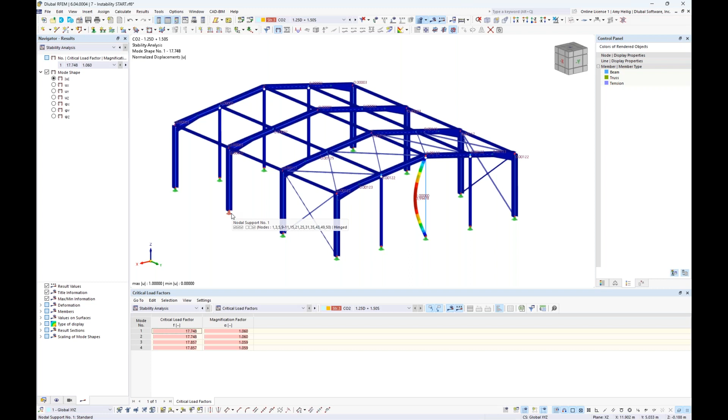So again, the structure stability add-on not only can carry out the buckling analysis of our structure, but we can also utilize it to help us with those modeling errors and instabilities.